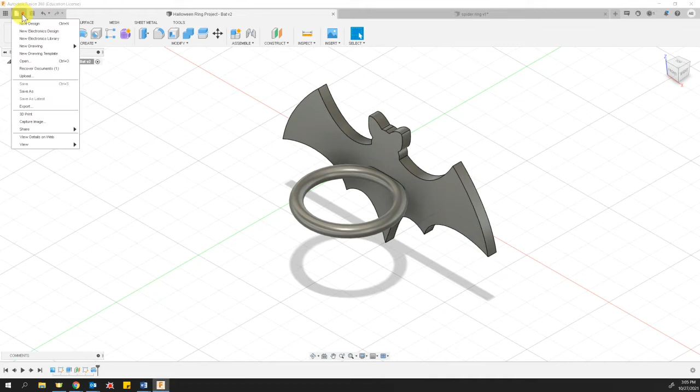We have to make sure that our design is saved by clicking the Save button. Once it is saved, we just want to go to the File menu. Let me turn on my indicator for you. The File menu. And we want to go down to New Drawing from Design. Okay. Now, before it gives us a new drawing, it asks us what options would you like to use.

We want to use the full assembly for now, since there's only one part. We want to create a drawing from scratch. We do want to make sure that the standard is ASME. Okay, and that stands for, I believe, the American Society of Mechanical Engineers. The ISO is the international one, which we're not going to use at this time. Okay, which makes our units be in inches.

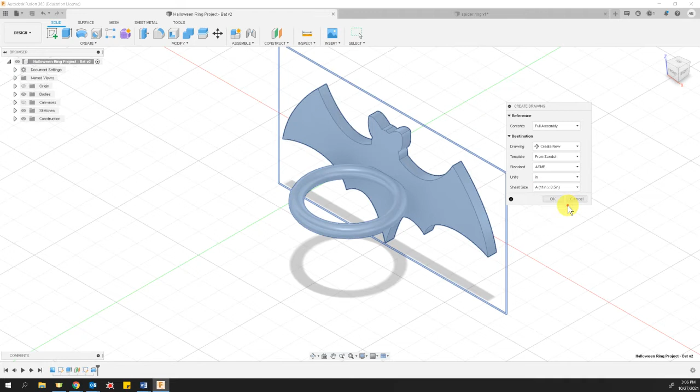And the sheet size, we want to use a standard piece of printer paper since that's what we have available to us at the time. We're not going to make it portrait style, which is the standing up version. We're going to lay it down on its side by having the second A option, 11 by 8.5 inches. And we click OK. It takes it a minute, and it's making our new drawing sheet for us, including the title block here, which we're going to eventually change.

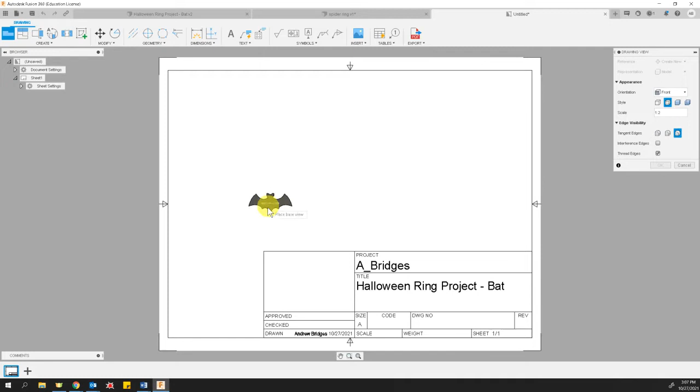So it starts us with a base view, okay, and it asks where do we want to place the base view. Well, because we're going to do a front top right side drawing, we're going to place the base view in the lower left. So I'm going to click to place it. Before I click OK on my menu, let's verify that the options that we have are correct. The front is the correct orientation. There are different styles here, but we like the visible with hidden edges.

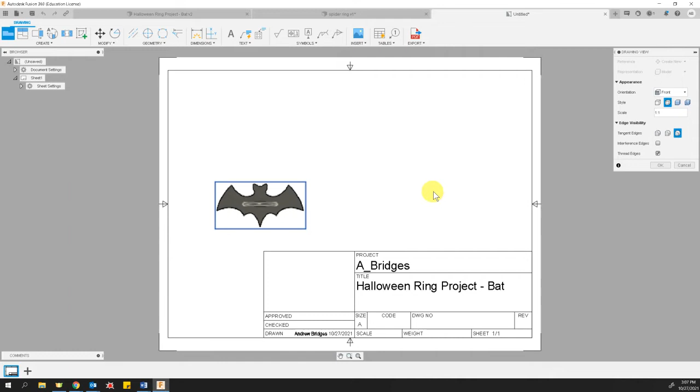Okay, here's what I'm going to change. The scale right now is 1 to 2, which is the same as half of its normal size. Okay, I think we could fit a full-size bat ring on this paper, so I'm going to change that to 1 to 1, and it looks like there's going to be plenty of room still here for the top and the right side and the isometric views. So now I can say OK. So it gives me a front view orthographic projection of my bat ring.

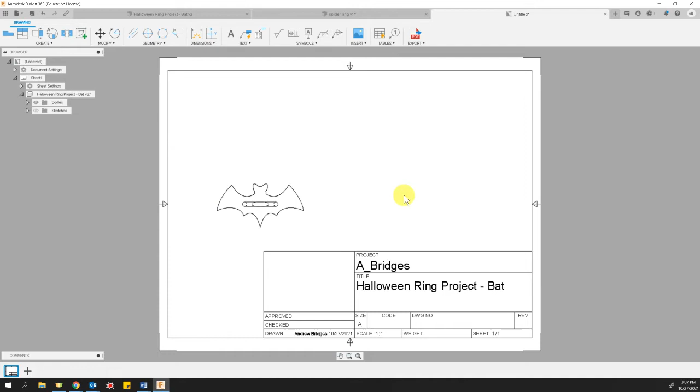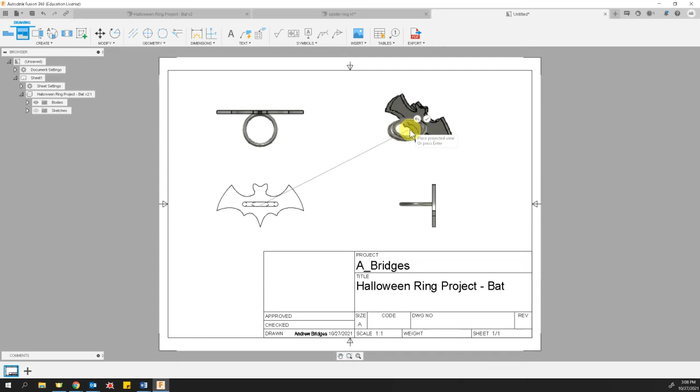At this point, I want to add some secondary views, some child views. Projected views is what they call them. And that's up here, projected views. And we want to project this main base view. So I'll click the base view, and then I'll go up to project the top. I'll go out to the right to project to the right side. And I will even put an isometric up in the corner somewhere in that vicinity. Make sure that you click the check mark when you're done. Well, that's neat, isn't it?

So the only thing that I see that jumps right out at me is this isometric view should not have hidden lines on it. So I will double click on that. It's going to bring up my drawing view options, and I'm going to change the style of the isometric to the far right, which is shaded, and then close. So we're looking pretty close here, folks. All I need from you at this point is just some basic dimensions. You don't have to go overboard. We haven't really gotten into all of the dimensioning rules. But we certainly know we can add the overall dimensions.

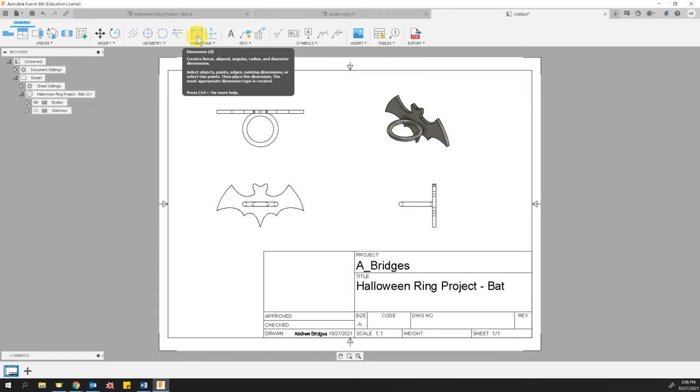So let's add some dimensions, and let's do the overall width up here on the top view. So from corner to corner, we'll place the dimension between views like so. Okay. We could do the overall height off of the side view like that. And you could even put some center marks in there using the geometry feature. So there's the center mark. We're going to mark the center of that ring right there.

Okay. And we could even do center lines if we wanted to, such as the center between, where are we going here? I'm having a tough time figuring this out. That's not what I want. Well, you know what? It's not letting me choose what I want, so I'm going to leave center line off. At this point, I'm going to go ahead and dimension. Okay. Again, we just said basic dimensions.

We can dimension the diameter of our circle. I'm trying not to make the dimension lines cross too much is what I'm trying not to do here. So that's why I'm having a difficult time. And I can even dimension the inner ring here if I wanted to, like that.

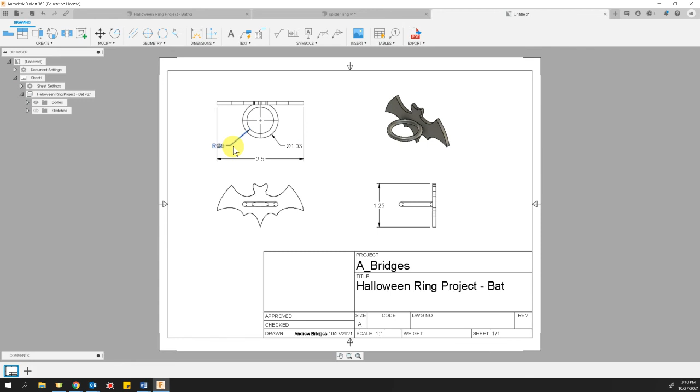Now you'll notice this gives us a radius and this gives us a diameter. I don't know why it's giving us a radius for the inner one. I'd really like to have a diameter there. So maybe what I'll do, let me try that again. There it goes. It gave us a diameter that time. So that's what I'm looking for.

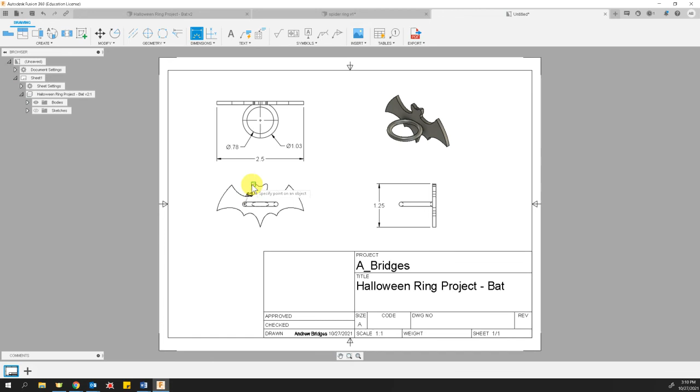Okay, folks, I think we're about where we need to be. We could certainly dimension from the top, from the circle to the top of the part, but really, I don't think any of those are critical dimensions. I think we've got what we need here, ladies and gentlemen.